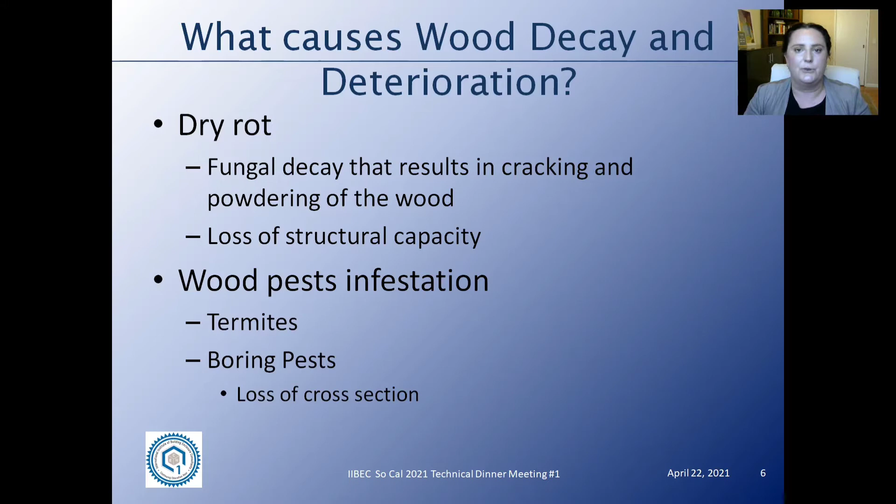Decay, or dry rot as it's less formally known, requires three different things to occur. It needs a food source, which is the wood itself. It needs water, and it needs fungal spores. So dry rot is actually a fungal infection that is eating away at the wood.

The main thing that really contributes to this is the presence of water. When we're talking about E3s, those are specifically wood elements on the outside of the building. Fungal spores are in the air, pretty much everywhere, and are blown with the wind. So the main thing we can control and look for is the presence of water and moisture. Really, it's regular and long-term exposure to moisture that can lead to wood decay.

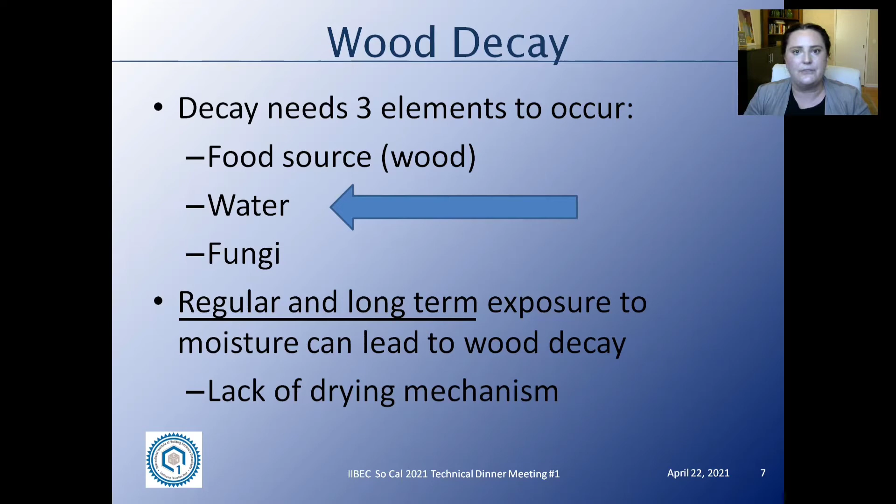Essentially the wood needs to get wet and not be able to dry out quickly. If you have a wood fence that's exterior and it gets rained on but is able to dry as soon as the sun comes out, you're really not going to get dry rot and decay like you would in an enclosed condition. What it comes down to is these E3s get water in through some kind of small opening or hole, and they do not have a good drying mechanism. So the water will stay for a long period of time and cause this fungal decay.

This is a fungus. Just because you can see and touch the soft wood in deterioration does not mean that is just the extent of the fungal decay. The guideline my company uses, and what we've discussed with different wood pathologists, is that the fungus can possibly penetrate into the wood 2 feet past what is visible decay.

If you have, like in this diagram I show, a part of the wood that's visibly decayed and is soft wood when probed, you should assume there's going to be further penetration of that fungal infection into the wood, possibly up to 2 feet.

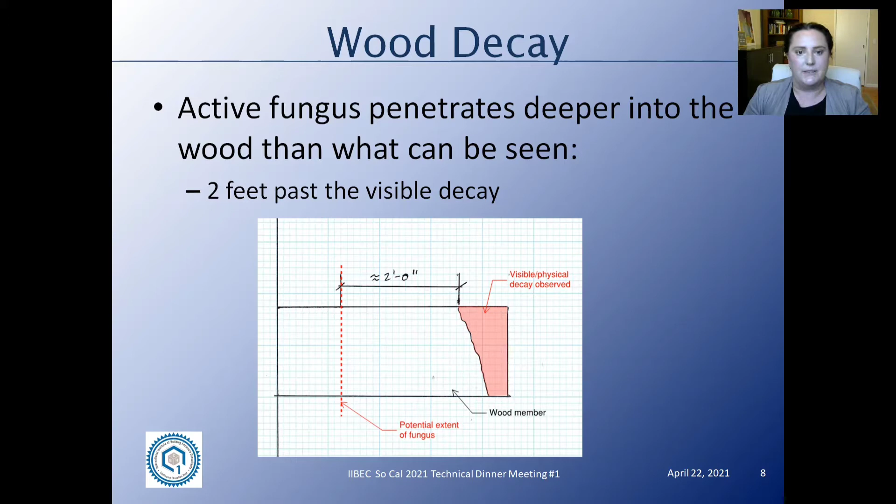Here's another example. This is a balcony deck with a coating on top of it. This portion of the deck was cut out, and you can see decay and deterioration within the plywood itself. This is cracking and delaminating of the plies of the plywood.

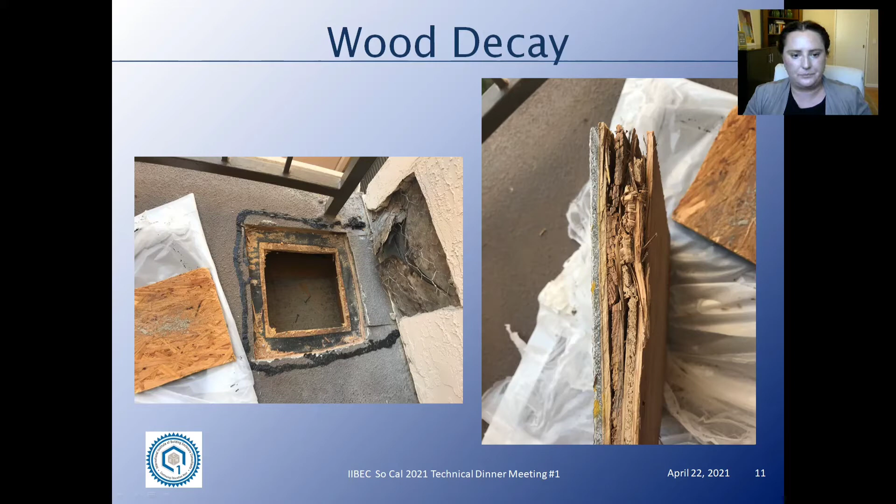Now let's talk about wood pests. There are lots of different types of wood pest. The main ones we find here are termites and some boring beetles. They tend to be attracted to wet wood. Really, for these pest infections, they need to be inspected by a certified professional.

The certified professional will be able to provide treatment options for this. But as inspectors, for the E3 inspectors, we can identify and look for some of the evidence that could indicate there's a wood pest infection.

The evidence really is termite waste, which is also called frass, and what I call wavy paint. The termites like to get into the end grain of the wood, and they eat up through the end grain of the wood parallel to the wood. So they'll eat underneath the paint a lot of times on the outside of the wood.

When they eat the wood and generate waste, it causes an expansion in volume, and it causes this kind of blistering that you can see in the paint. I'll show some examples of that.

This is a map showing the presence of termites throughout the United States. As you can see in California, and particularly along the coast, we have a very heavy presence of termites, and heavy to moderate up towards the more inland parts of California.

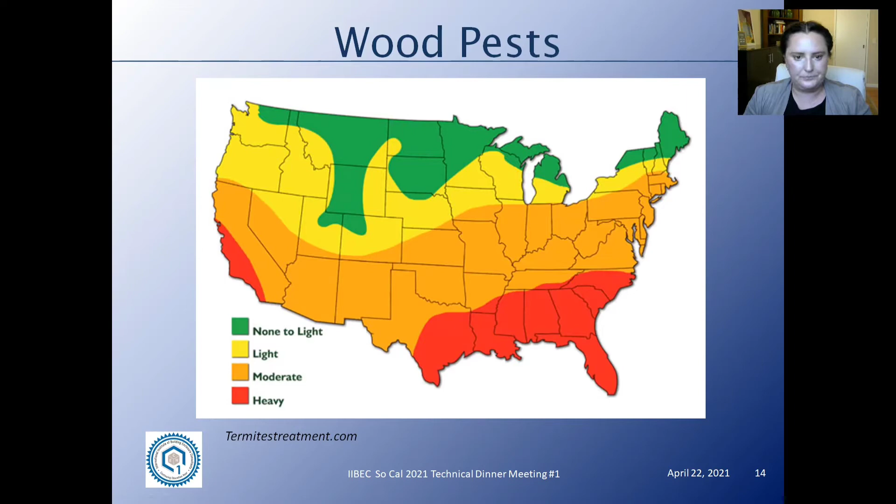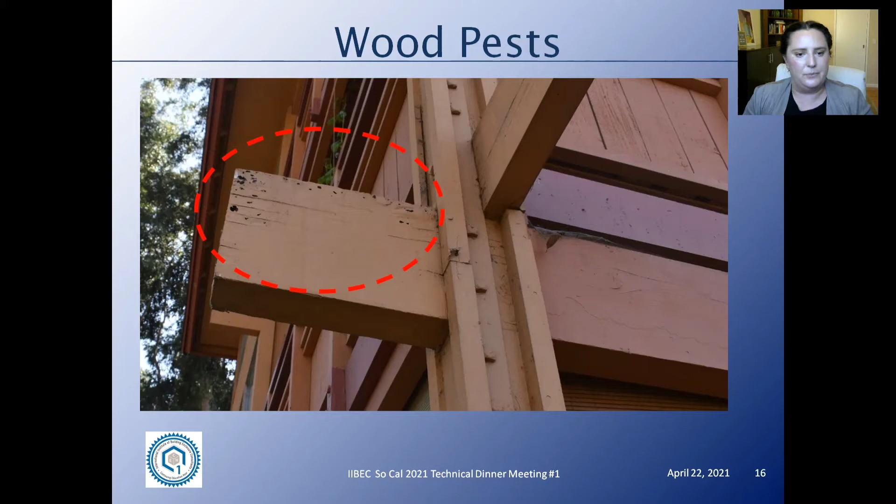So here's an example of a wood member, and here's a good example of some evidence of wood pest infestation. We have these small boring type holes throughout the wood, and you can also see a blister or a bubble that I call wavy paint.

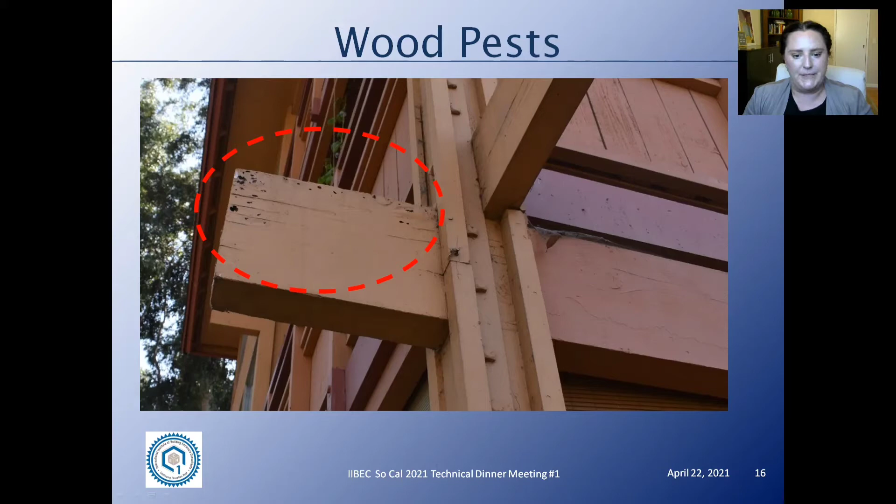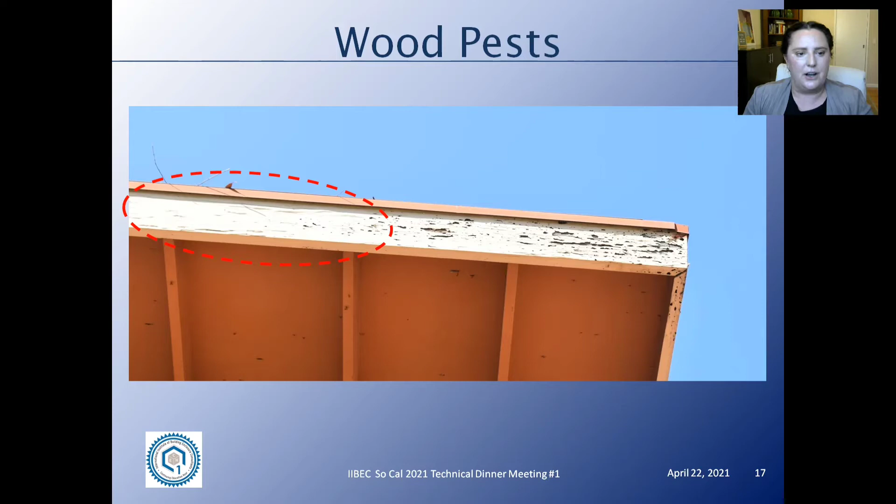Here's another good example: we've got some boring holes over here, and a lot of paint flaking. To the left, you can see the wavy paint areas. These could indicate that termites have actually gotten into this member and eaten along the end grain, causing little pockets of waste to form underneath the paint.

So now let's go into the basics of E3, particularly in the framing of the E3 elements and how that relates to inspection. What areas should you be concerned about when looking at these different elements, and what areas should you be paying attention to on a structural basis?

There are several different framing techniques, and a couple typical ones we see for these exterior elevated elements. First is cantilever, where the element cantilevers out from the building. Second is simply supported, which can be done in a multitude of ways, such as beam and post supported, or ledger and beam supported elevated elements. We also see quite a lot of cantilever combined with simply supported.

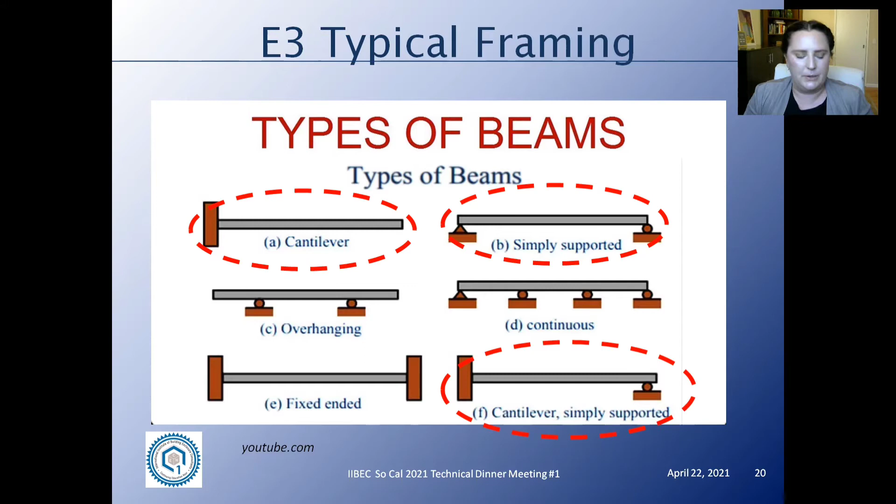This is framed by cantilevering out from the building, and then either a beam and post type support on the free end of the cantilever.

When looking at the loading diagram on a cantilever, this is a typical uniform distributed load on a cantilever beam. You can see our max shear happens where the beam enters the building, right at the support point, and our max moment also happens at that point.

So when looking at this from an E3 inspection type, we're concerned mainly with the structural capacity of the framing as it enters the building. If we have significant decay and deterioration where the beam enters the building, we could have a very problematic condition, because that is where the highest load and highest moment is happening within the beam.

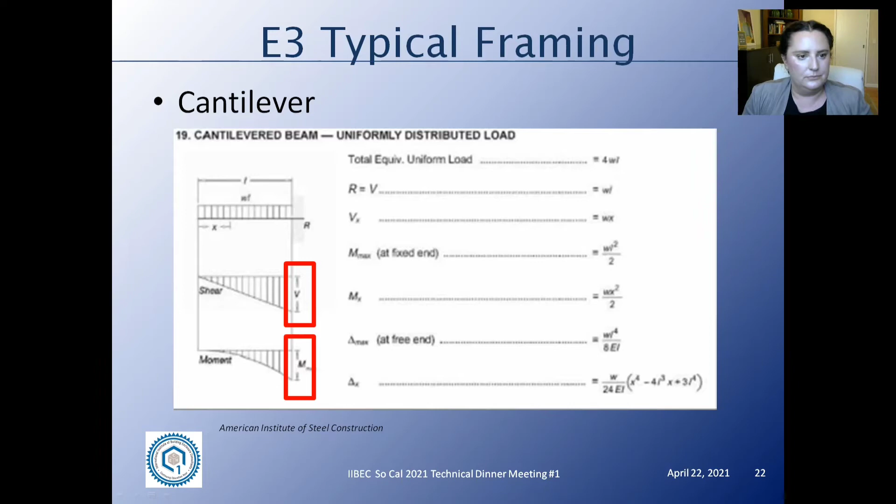When looking at a uniformly distributed load on the load diagram, the maximum shear is happening at the supports, and the maximum moment is happening in the middle. So when looking at this type of framing, you should be concerned with where the supports are occurring, where the high shear loads are occurring, and where the moment occurs in the middle of the beam.

One thing to note too, in terms of structural concern, right adjacent to where the support is, that's the concerned area, because your support is holding up this max shear here, but just to the left of it, just where the support ends, that's where you could have a catastrophic failure.

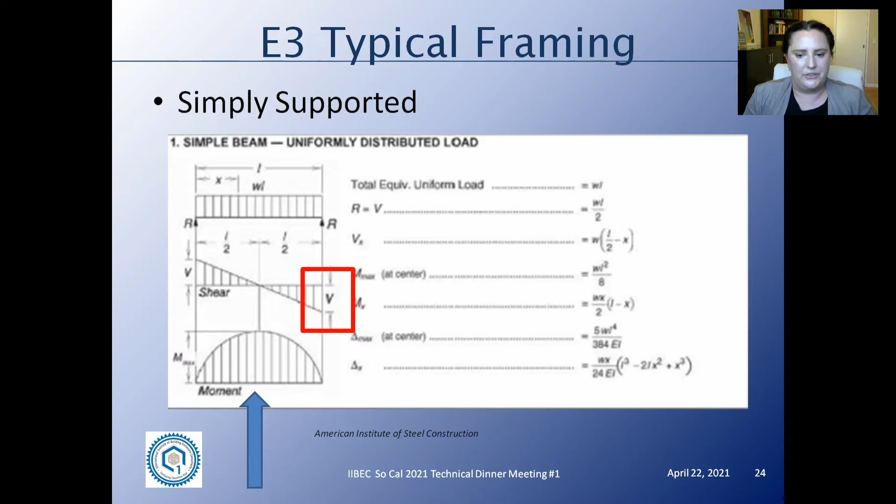So when looking at the support and loading diagram for that, it's a little bit more complex. We have shear locations at the supports, high moment where the cantilever beam enters the building, but also high moment in the middle of the span, and a shear at the free end of the cantilever. Essentially, the more supports you have, the more complicated the structural framing is, and the more areas you need to be concerned about when inspecting it from an E3 inspection point of view.

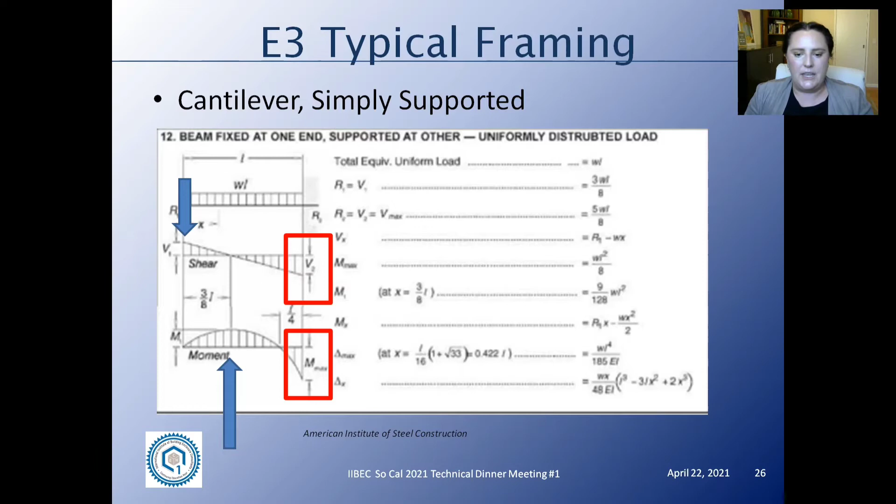The higher the amount of supports, you have an increase in redundancy. So in a cantilever situation, if cantilever joists fail, you have less redundancy to help keep the E3 element from collapsing. When you have multiple supports, like simply supported or cantilever and simply supported situations, you have a lower chance of an extreme catastrophic failure because you have more redundancy in your support system.

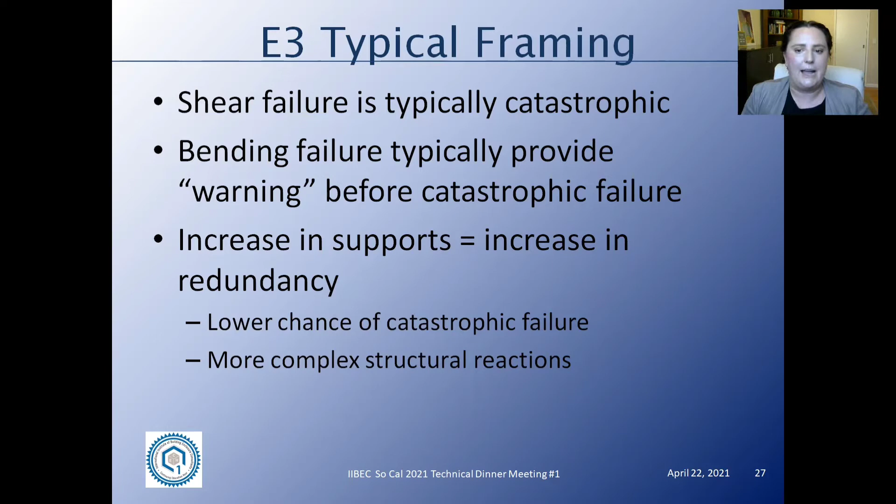Typically, when it comes to different types of failures, shear failure is considered more catastrophic. There's usually less warning provided on that. A bending failure typically provides some type of warning before a catastrophic failure, like extreme deflection in your joist, sagging, that kind of thing. So usually the bending failure is less catastrophic because you get a warning system, you can see it happening before you get an extreme failure.

So let's look at the different railings. These railings are also included in your E3 inspections, which we'll talk more about later, and they are considered part of the life safety. A lot of times people lean on these railings, and they're meant to prevent people from falling off of these balconies. So these are also very critical areas that need to be inspected as part of the E3 inspection.

So there's really two different kinds of framing for a railing system. There's the fascia supported or face mounted railing, where it's secured through the face of the balcony or the E3 element.

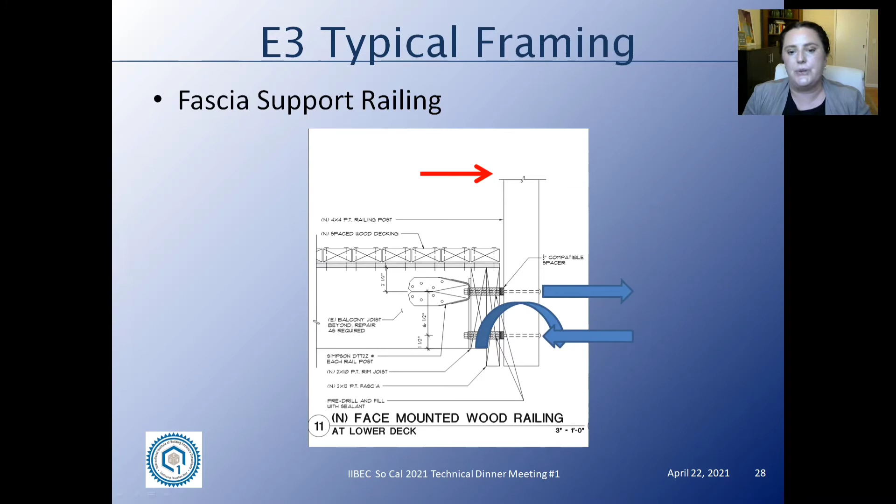Here's an example of a detail. If you push at the very top of the railing, it causes a moment down at the anchor points. A moment is also considered a couple force, or a coupling force, so it results in a tension and compression force within the anchor of this framing. So when considering where the structural concern would be on this balcony, you really want to look at these anchor supports and the wood framing members connected to them. If any of this wood framing or anchor systems have decay and deterioration, that should be noted as a concern that needs to be addressed at some point.

Now let's look at a top supported railing. This is the other style, typically done through base plates and individual posts or a shoe type railing system, secured through the top walking surface of the deck. Structurally, when we push that railing over, it creates a moment down at the base, which results in compression and tension forces within the anchors. So again, we need to look at these anchor bolts and the surrounding wood members supporting this railing to see if there's any decay or deterioration.

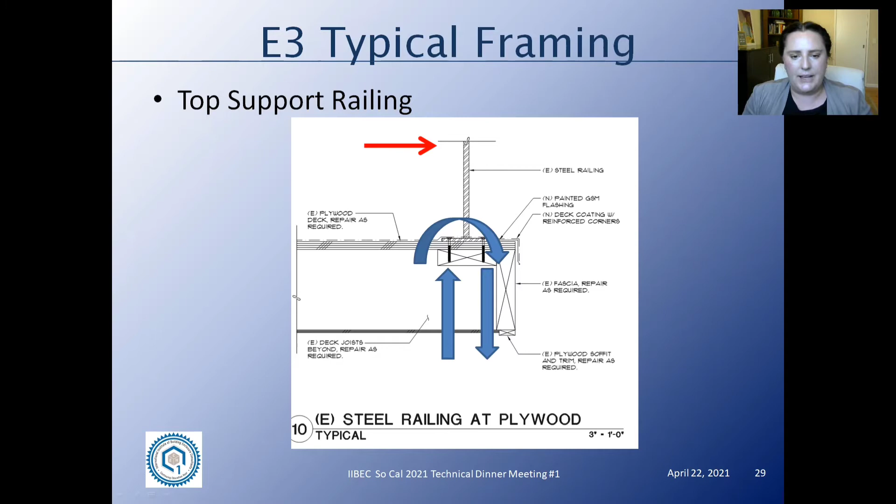One other item to note is that when looking at guardrails, we also need to look at the panels in the guardrails. Between the framing support posts, the panels are there to prevent people from falling off a balcony or going through it. So those also should be structurally sound when doing these inspections.

Looking at the E3 typical framing, there's decking, which can consist of a lot of different types: 1x2 wood decking, composite decking which is still wood-based, plywood sheathing with a waterproofing layer and a concrete topping, sometimes tile topping, and plywood sheathing with traffic coating directly on the plywood sheathing.

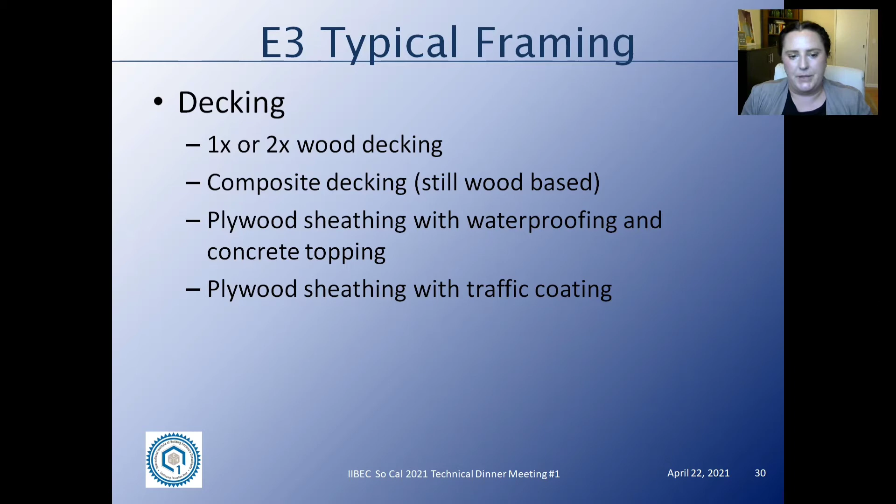Supporting members can vary as well. They're typically around 2x or 4x joists, or 4x or 6x beams and ledger type situations. There could be posts, 4x or 6x wood posts with a concrete post-base foundation, or they could also be steel posts. Those are not required as part of SB 721 and SB 326 because they're steel, so we'll get a little into that when talking about the different Senate bill requirements.

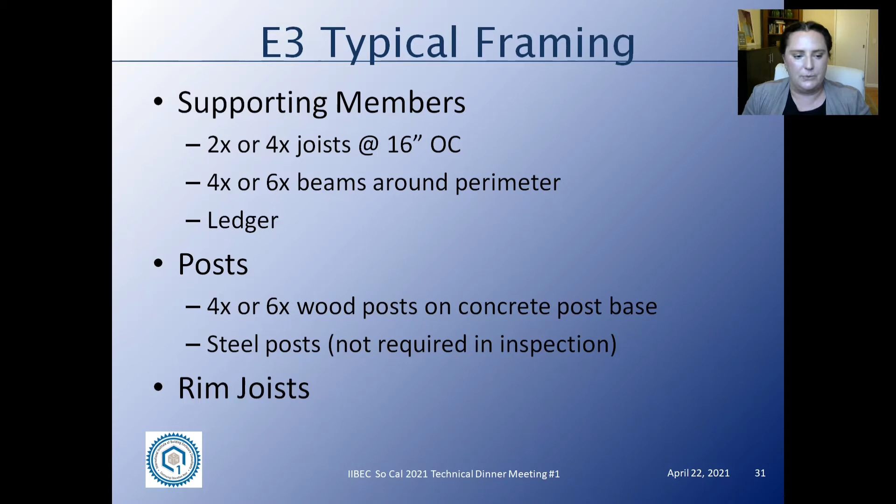Rim joists a lot of times are part of this, along with fascia and blocking. If you're looking at stairs, you can have stair stringers, which could be 2x wood framing, and risers and treads, which could be 1x or 2x wood. Guardrails can consist of a lot of different types: wood framing with posts and panels, wood framing with posts and spindles. You could have a completely metal railing, glass railing, and fascia mounted or top mounted typically is the framing part.

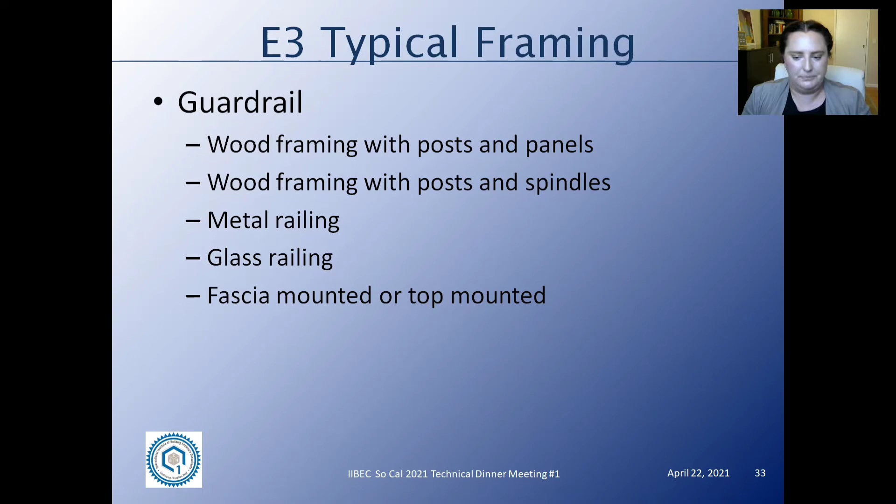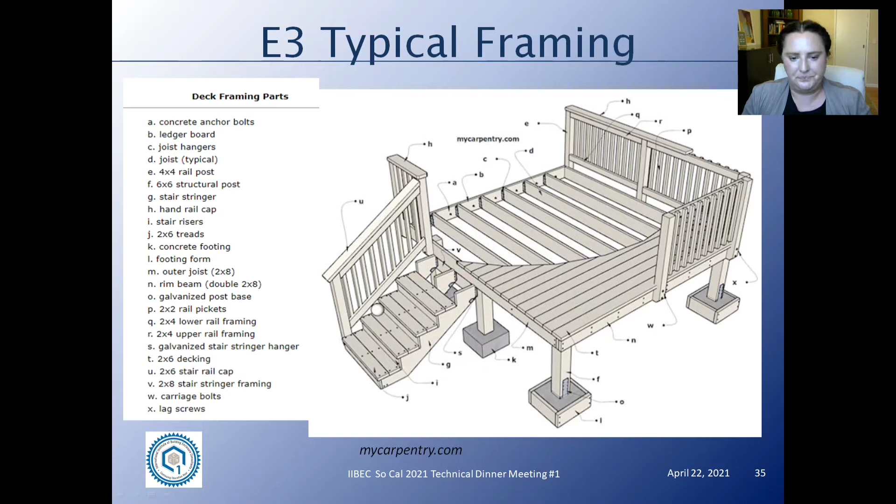So that's the basics of framing and the structural basics of how these E3 work. Now we're going to go into why we need to do these inspections.

On June 16th, 2015, there was the Berkeley balcony collapse. This is a very famous incident. It was a party at an apartment near UC Berkeley. The fourth floor balcony collapsed onto the third floor balcony and several people fell to their deaths. Six people died and seven were injured.

Wood decay was found to be a contributing factor to this collapse, and it resulted in several different actions, along with some other failures, pretty significant failures that occurred.

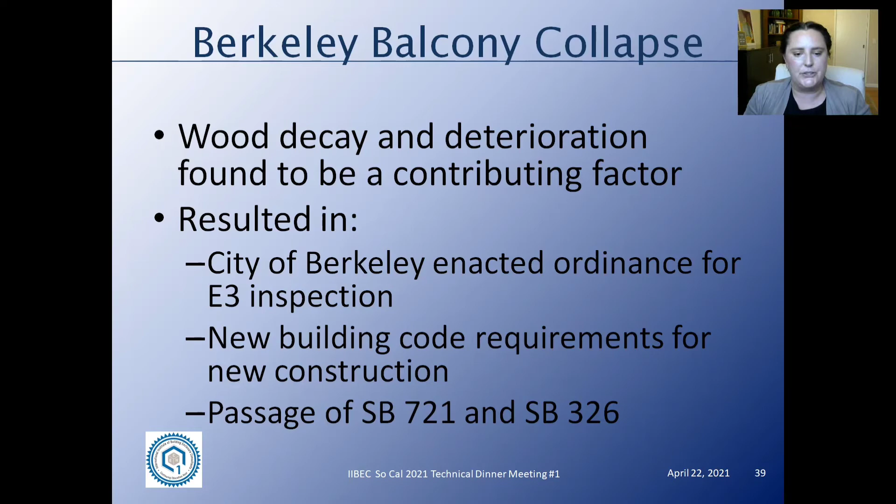The first thing was the city of Berkeley enacted an ordinance for E3 inspections. There were new building code requirements for new construction that was enacted in the 2017 emergency addendum and is now fully part of the 2019 California Building Code. It also resulted in the passage of Senate Bill 721 and Senate Bill 326.

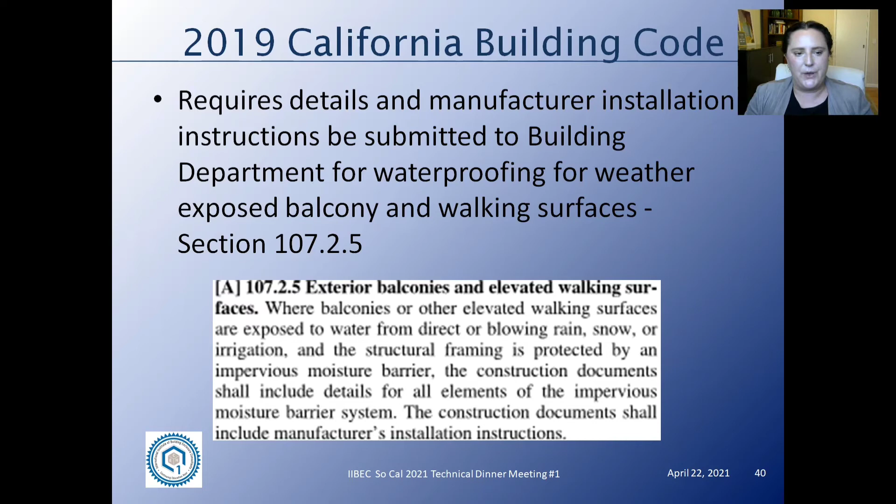So let's briefly look at what the new code requirements are for new construction. It requires details and manufacturer installation instructions for waterproofing for the weather-exposed balconies and walking surfaces to be submitted to the building department. It also requires either a building official inspection or a special inspection for the waterproofing portion of weather-exposed balconies.

The city, the municipalities can either include it as part of the building inspector's job or require special inspections. And we have actually seen some municipalities enact special inspections.

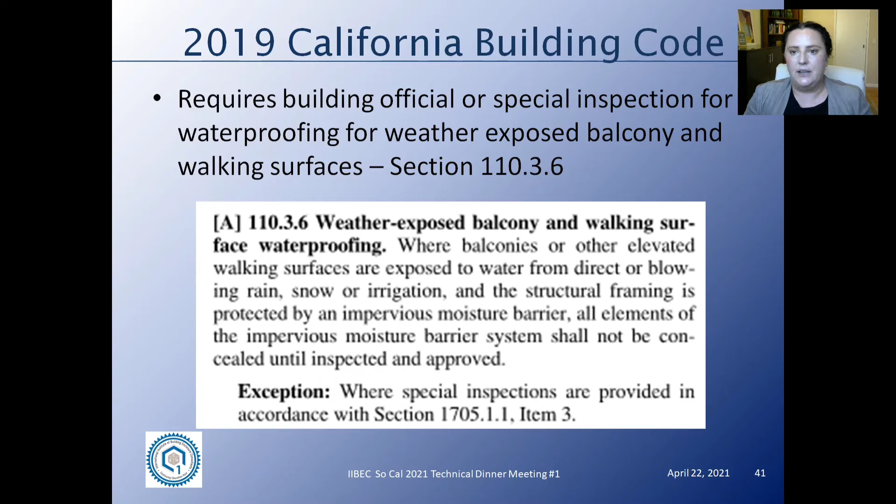And those special inspections are required under Section 1705.1.1, Item 3, which requires materials and systems to be installed in accordance with manufacturer's instructions that prescribe requirements not contained in this code.

It now requires venting in enclosed soffits underneath balconies and exterior elevated walking surfaces.

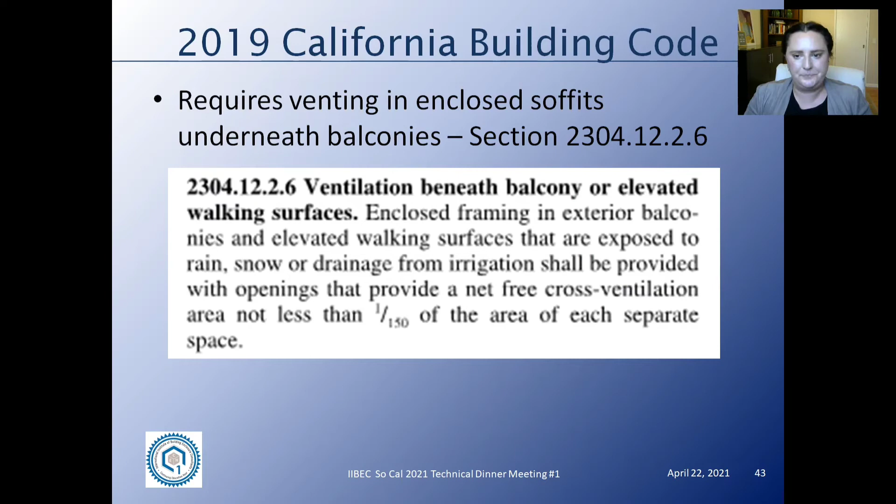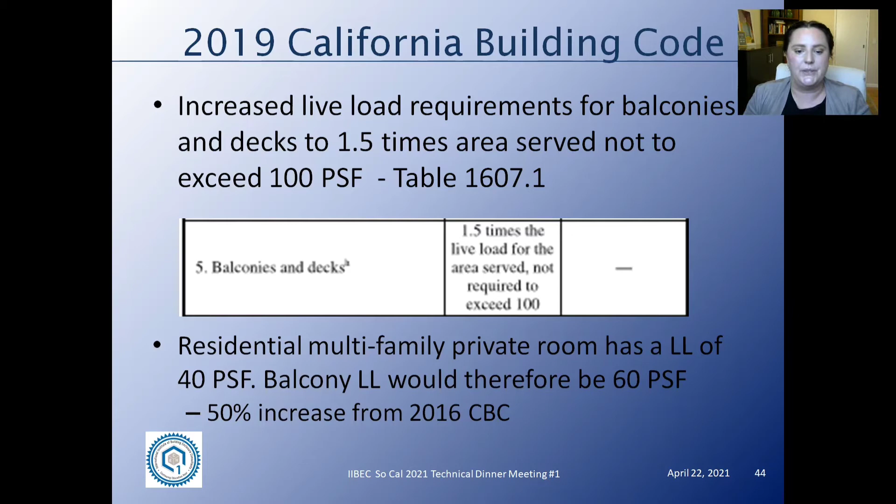And finally, it resulted in SB 721 and SB 326. These are two Senate bills that were passed to require regular inspections of exterior elevated elements.

First, we're going to go into some definitions. So what is an exterior elevated element? This includes balconies, decks, porches, stairways, walkways, and entry structures that extend beyond the exterior walls of the building, has a walking surface that is elevated more than 6 feet above ground level, is designed for human occupancy, and relies on wood or wood-based products for structural support.

Railings and guardrails are also included in these E3 elements, even if they are not wood-based. So if you have a metal guardrail on a wood-based exterior elevated element, then that is considered part of the Triple E.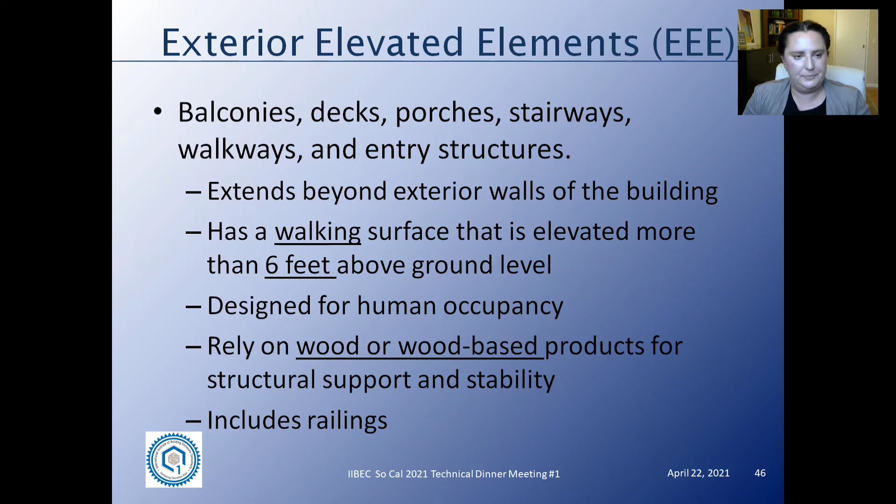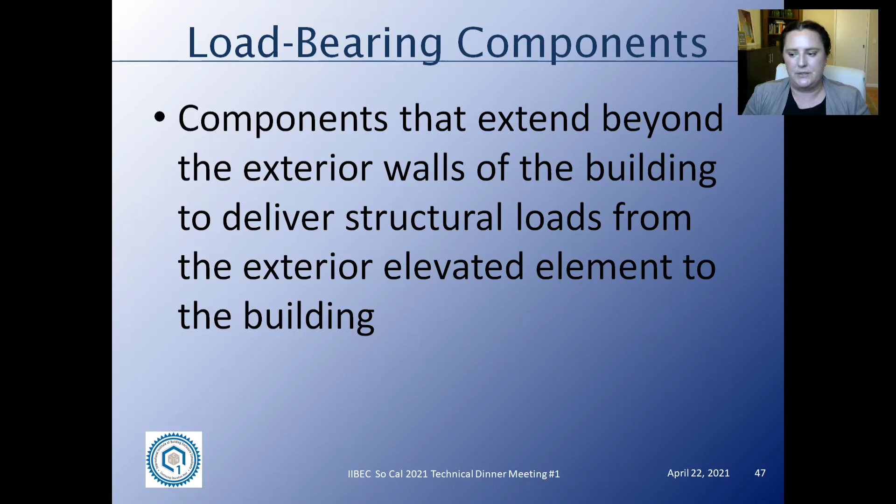And then what are load-bearing components? These are components that extend beyond the exterior walls of the building to deliver structural loads from the EEE to the building. So that's all the structural framing that holds up these EEEs.

And associated waterproofing elements is defined as items that protect load-bearing components of the Triple E from exposure to water and the elements. So this is flashing, membranes, coatings, sealants, etc.

So first, let's look at Senate Bill 721. This was passed in 2018, and it requires inspection of Triple E's of multifamily residential buildings with 3 or more units. This excludes common interest developments, so condos and co-ops, etc., are excluded from SB 721.

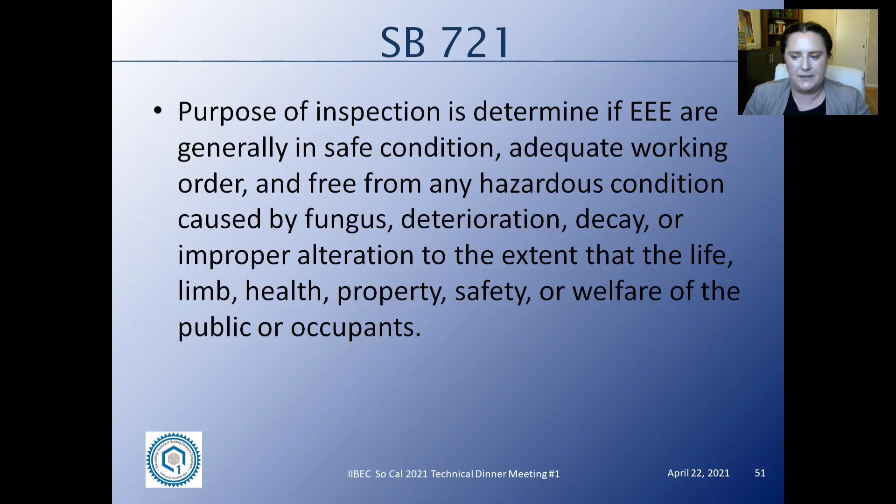As a direct quote from the bill, the purpose of inspection is to determine if the Triple E's are generally in safe condition, adequate working order, free from any hazardous condition caused by fungus, deterioration, decay, or improper alteration to the extent that the life, limb, health, property, safety, or welfare of the public or occupants. So that is the main purpose of this bill.

It requires a minimum of 15% of the load-bearing components and associated waterproofing elements of the EEEs to be inspected on a building. The report is due to the owner within 45 days, and the owner is to keep a copy of that report for 2 inspection cycles. And it should be noted that the report timeline does not depend on how many EEE elements are inspected. If you inspect 3 balconies or 300 balconies, you still need to give the report to the owner within 45 days.

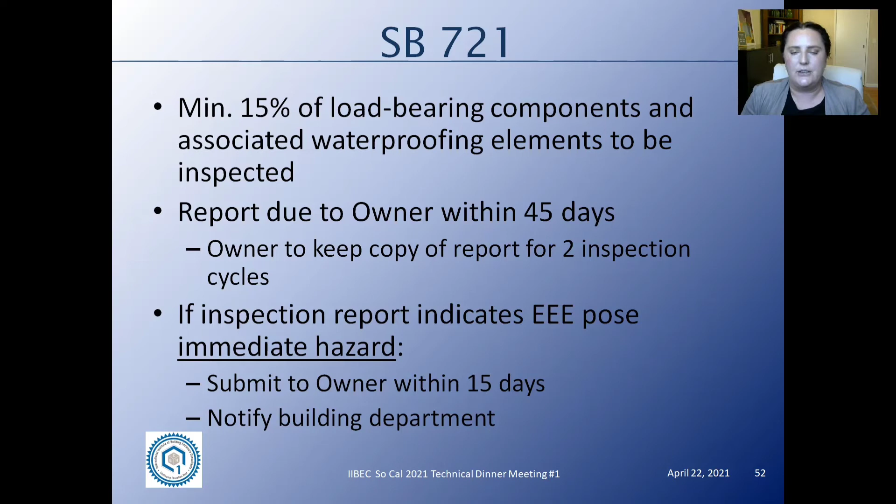If the inspection report indicates that one or any of the Triple E's pose an immediate hazard, then you need to submit that immediate hazard report to the building owner within 15 days, and you also need to notify the authority having jurisdiction. These inspections can be performed by a licensed architect in the state of California, a licensed engineer from the state of California, a licensed contractor with an A, B, or C5 license with a minimum of 5 years experience, or a certified building inspector.

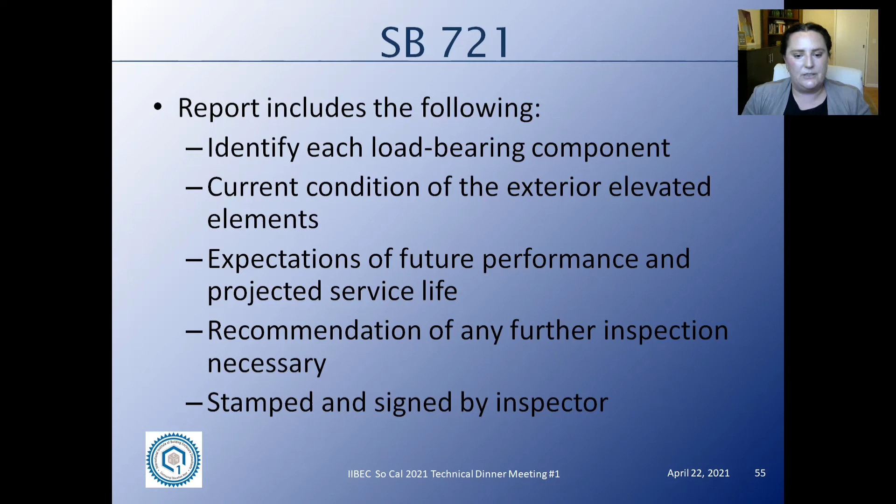The inspections need to occur every 6 years, so this is an ongoing maintenance item that building owners need to do. And the first inspection needs to occur by January 1st, 2025. And the inspection entails a quote-unquote visual inspection of load-bearing components and associated waterproofing elements of the EEEs. The report needs to include the following. Identify each of the load-bearing components, so a diagram of the structural framing is a good idea. It needs to say what the current condition of the triple E is, expectations of future performance and projected service life, recommendation of any further inspections, and it also needs to be stamped and signed by the inspector.

It also needs to include photographs, test results if you do any kind of testing on these elements, and a narrative of what was observed and what was inspected. And if any of the triple E's pose an immediate threat to the safety of the occupants, the inspector in the report needs to indicate whether restricting access or temporary shoring is necessary. Following these reports, if there's any immediate hazards noted, then the owner needs to immediately start repairs or actions to limit access to that triple E.

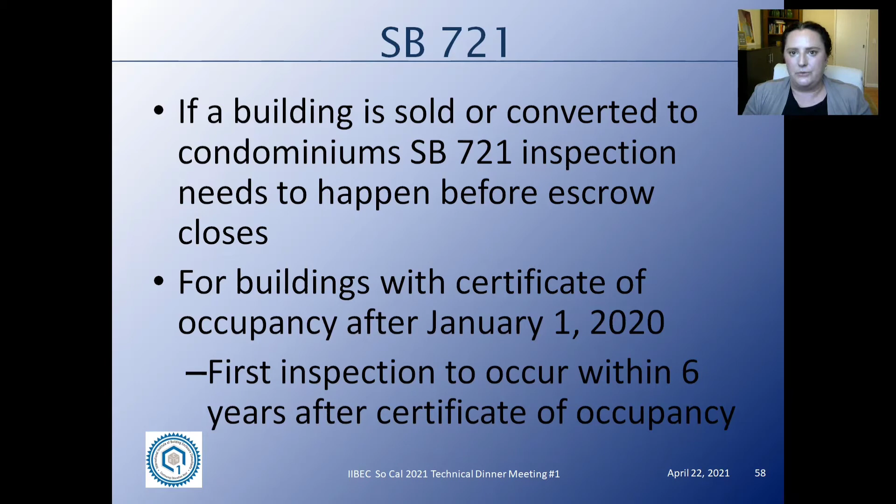Any corrective work identified in the report needs to be completed within 120 days of an approved permit. If the owner is not compliant within 180 days, there are fees that can be implemented by the building department. If a residential building is sold or converted to condominiums, the SB 721 inspection needs to happen before escrow closes. And for buildings that were built after January 1st, 2020, the first inspection needs to occur within 6 years of the certificate of occupancy. So this is something to note too. The age of the building does not matter for 721. Even brand new buildings are going to require these regular inspections.

So now let's look at 326. And 326 was passed to close the gap that 721 left with respect to condos and common interest developments. So 326 is the same EEE inspection requirement for common interest developments. This was passed in 2019. And again, it's inspection of the triple E's of multifamily residential with 3 or more units. So if you have a duplex, it's not considered part of this requirement. Again, the purpose of the inspection is to determine if the triple E is generally in safe condition, adequate working order, and free from any hazardous conditions caused by fungus, deterioration, decay, or an improper alteration.

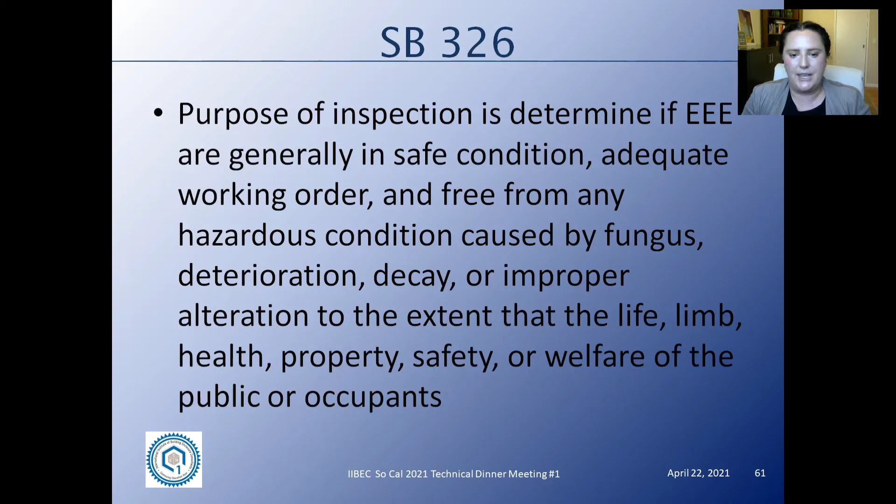A little bit different. The amount that needs to be inspected is a random, statistically significant amount. That means the amount that can provide 95% confidence with a margin of error of plus or minus 5%. So this Senate bill leaves it up to the inspector to determine how much needs to be inspected as part of their professional judgment to provide 95% confidence. The report is due to the owner. However, there's no timeline given, and the owner is still to keep a copy of the report for 2 inspection cycles. And by owner, I mean HOA or board. If an inspection report indicates the triple E poses an immediate hazard, you need to immediately notify the owner and notify the building department within 15 days.

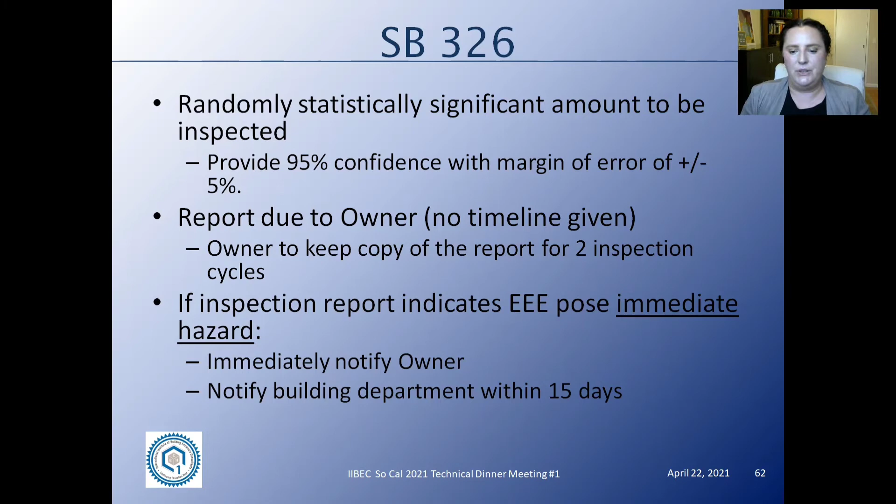These inspections can be provided by a licensed architect and a licensed engineer in the state of California. The inspection cycle is every 9 years, and the first inspection is to occur by January 1st, 2025. And again, it's a quote unquote visual inspection of load-bearing components and associated waterproofing elements. And the report requirements are the same as for 721. And again, if any triple E's pose an immediate threat to the safety of the occupants, the inspector or the report writer needs to indicate whether restricting access or shoring is necessary.

Following the report, repairs or actions need to happen immediately to address the hazardous conditions, so the immediate threat to life safety conditions. For condominiums with a certificate of occupancy after January 1st, 2020, the first inspection has to occur within 6 years of the certificate of occupancy. So like 721, for 326 the age of the building does not matter. Brand new buildings will also need to follow these inspection requirements.

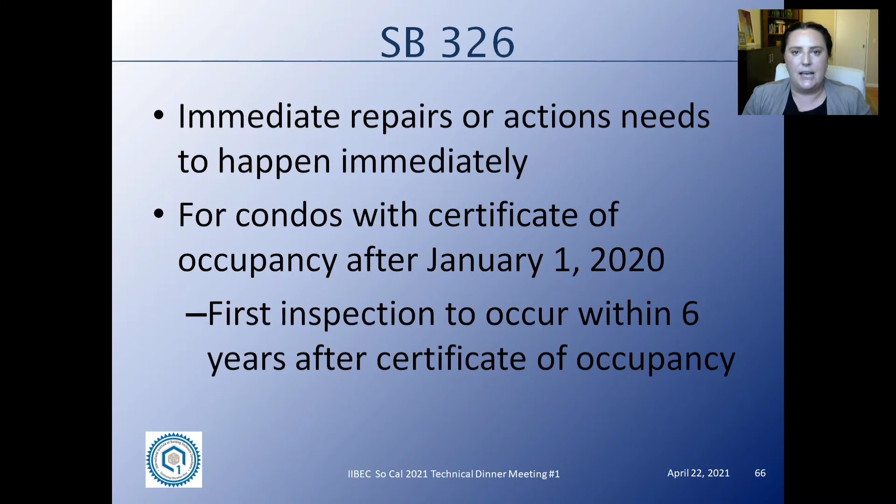So let's look at the main differences between 721 and 326. 721 is for multifamily residential of 3 or more units, excluding common interest developments, excluding condos. A lot more people qualify as inspectors under 721. You could be an architect or engineer or a GC or certified building inspector. The cycle's a little bit quicker, of 6 years, and there are timelines of when the report's due to the owner and when the owner is required to make repairs. And it also requires a 15% minimum inspection.

326 is specifically for condominiums and common interest developments. It limits the people who are qualified to be inspectors to just architects and engineers. The inspection cycle is every 9 years. There's really no time limit unless there's an immediate threat identified. And the amount of inspection is really left up to the professional judgment that will provide a 95% confidence with plus or minus 5% margin of error. So essentially you have to be a statistician to determine how much of the E3s you need to inspect.

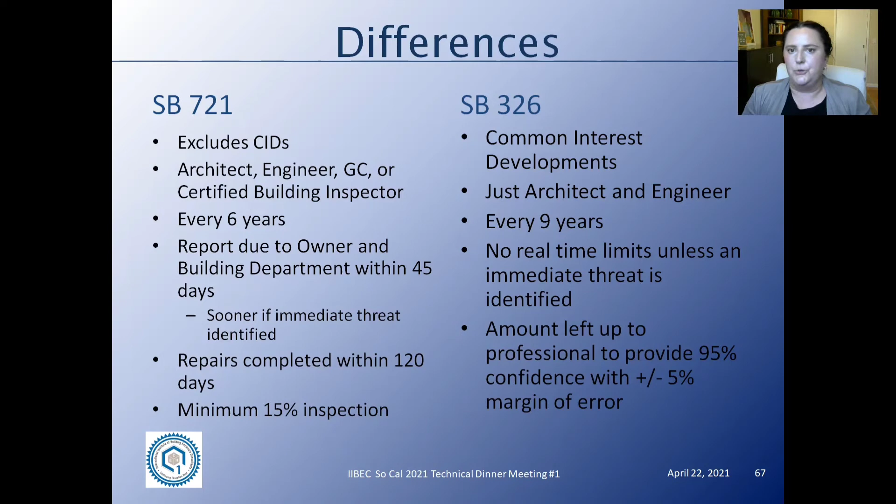One thing to note for both 721 and 326 is if problematic conditions are observed, then you are required to do additional inspections. The amount additional is left up to the professional. So if you inspect 100 balconies and 50 of them have problematic conditions, you as the professional need to determine how many more you want to inspect. It could be you now require full inspection. It could be now you only need to see an additional 2 or 3. It is left up to your professional judgment.

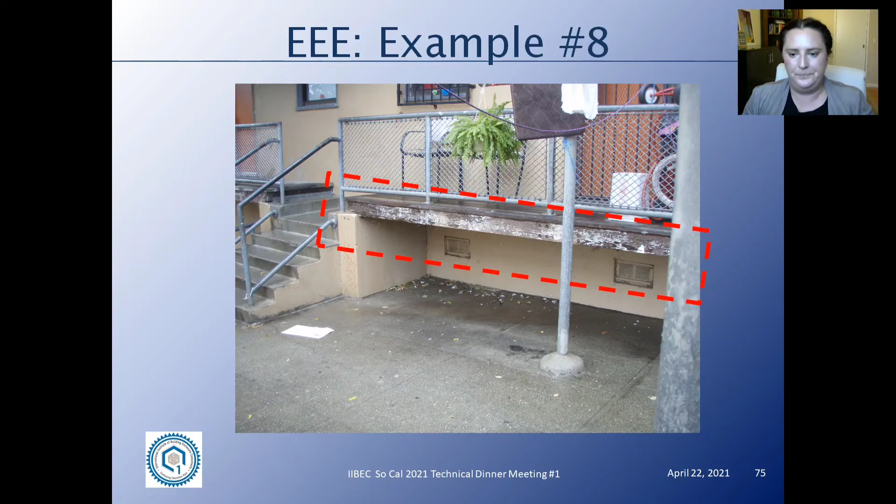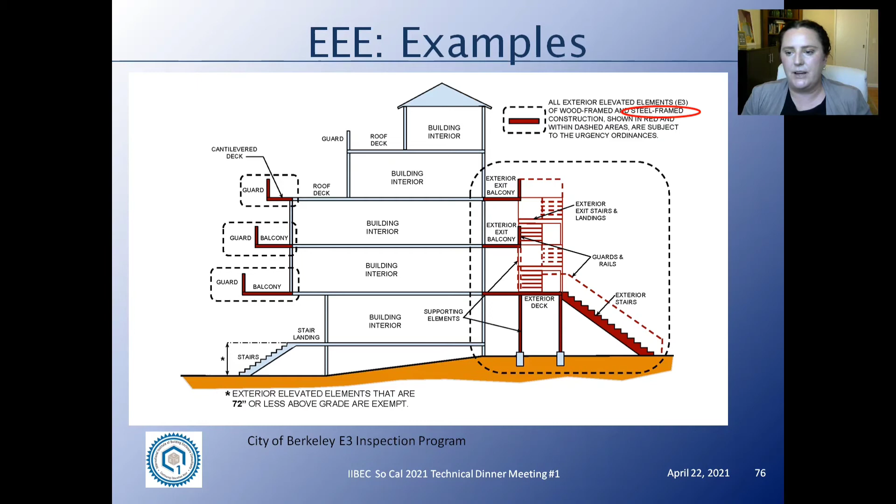And here's a great diagram. This is from the City of Berkeley E3 inspection program. So this diagram shows that these elements, these balconies and guardrails that are extended out, are part of the E3. Same thing with this stairway here. You can see here this stairway is not because it's indicated as less than 6 feet. And then also something to note, these roof decks that are over occupied space are not part of the E3 requirements. One thing to note that's different about the City of Berkeley is that they also include steel framing within their E3s, whereas the 2 Senate bills are purely for wood framed or wood based products.

So a couple tips when proposing inspection work and keeping your owners and clients informed. I would inform the owner that you're going to need access to both the top and the underside of the triple E's. So you need to look at both the framing of the balconies and the exterior walking elements, and also look at the decking and the guardrails on top as well. So typically that means you're going to need access to the underside, and you're possibly going to need access through units in order to get to the top side of these decks.

You may need to perform DT to review the load-bearing components. So if you have an enclosed soffit, the only way that you're going to see the load-bearing components is if you actually get in there, so it's going to require opening up some of these areas. And just keep in mind too, this has to happen on a 6 or 9 year cycle. So you're going to need to do these DTs every 6 or 9 years, depending on the construction you have.

One thing to note too, when performing due diligence or property condition assessment, inform the owners of the building that it's going to require regular inspection based on the 6 or 9 year cycle, because of these Senate bills. You also want to indicate to the owner or HOA that they may need to carry a budget to perform immediate or emergency repairs.

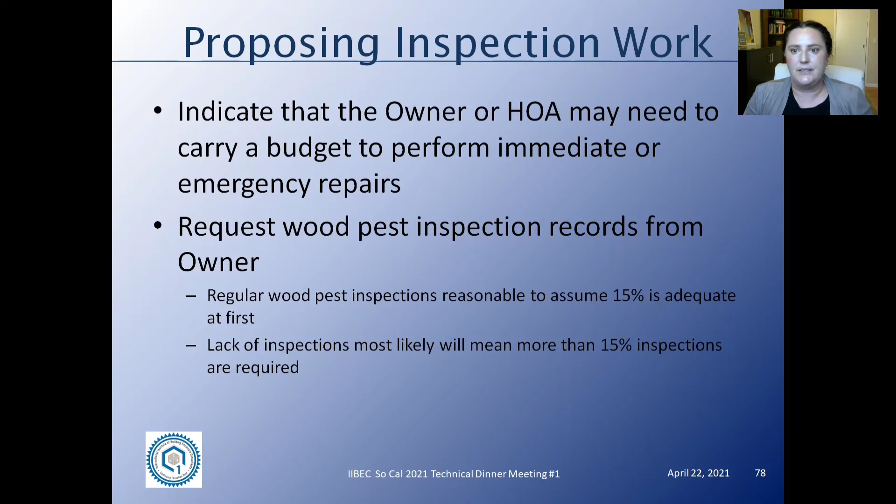I went to a wood framed construction seminar a couple years ago, and there was a wood pest expert there, and he recommended getting an inspection every year. And so at my personal house, I have started getting a termite inspection every single year. And every year there are termites that need to be treated. It's just a constant issue that we have to deal with in California.

So now let's go into the means and methods of doing these inspections. The number one question I get on these inspections, particularly if you have an enclosed soffit, is do we need to probe and do we need to do destructive testing in order to remove the soffit to physically probe the structural members? There are people and companies out there that say that they can basically drill a small hole and use a borescope to look at the framing. And technically the Senate bill does say it's a visual inspection. However, I'm going to give some examples as to why I think you need to probe.

Probing uses a sharp tool like shown down here. You can also use something like a flathead screwdriver, even sometimes a pen or keys if you're really desperate. What it does is check for soft wood that indicates decay. It's also a good way to find evidence of wood pest, because a lot of times when I probe that wavy paint, you have wood pest waste that comes out, and you can easily indicate that there's some wood pest infestation.

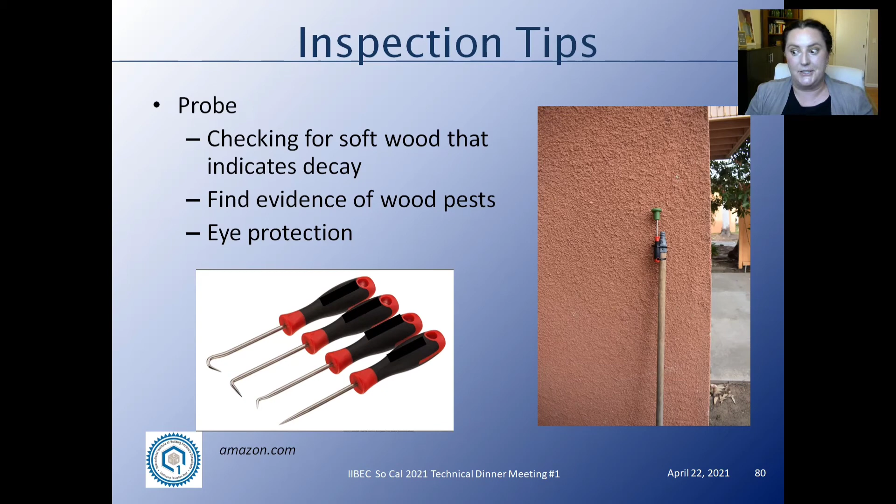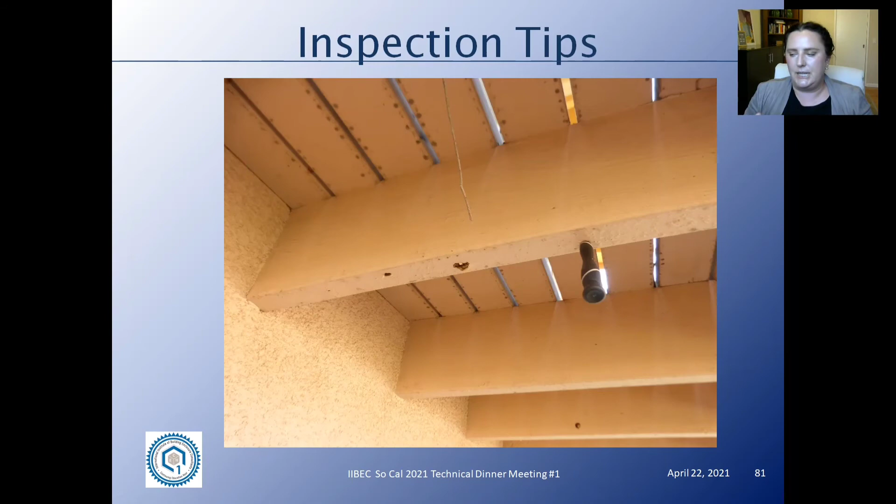So why do we probe? If you look at this photo here, this photo was provided by Tracy Myers of Myers Consulting. Thank you to her. This is a cantilever wood joist. If you ignore these previous probes and you look at this joist, it looks like it's in pretty pristine condition. Visually, I don't see any issues with it. But as you can see, this is a probe that's inserted 4 to 6 inches into this wood. That is how much this joist has decayed. So just visually looking at something, you're not really going to be able to tell the condition of that wood unless you probe.

So then I also recommend checking the guardrail. This is very important as the guardrail provides a life safety measure. First, I shake the guardrail, see if it's loose. If it's loose, you can pretty much guarantee that either the connections, the anchor bolts, are deteriorated, or the wood that's holding the anchor bolts is soft and deteriorated as well. If the wood surrounding the anchor bolts has lost some of its structural capacity, your anchor bolts now do not have solid wood to grip onto. So your guardrail will be loose.

Also check the guardrail panels. As I mentioned before, panels are there to provide a structural barrier so that people can't fall off or things can't fall off these balconies. Check for soft spots in the decking. So when you walk around, feel for soft spots and bounciness within the decking itself.

If you have a plywood sheathing with a traffic coating, look for cracks and seams within that traffic coating and then the plywood, as those are the first areas that generally will fail and cause water to be able to get in.

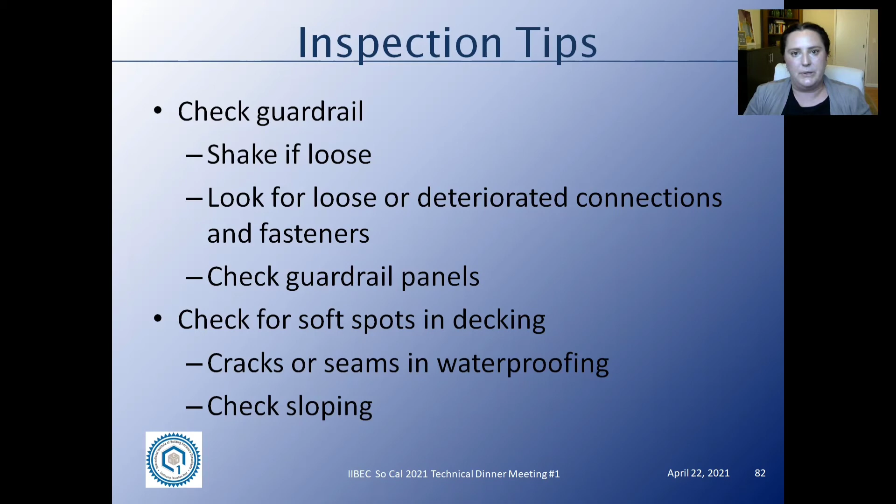If your balcony slopes to some kind of area drain, or if it's supposed to slope to sheet drain off the edge, check for sloping, because if you have water that's ponding on your balcony in specific areas, that could indicate that, one, you have decay in your framing underneath that has now settled and allowed for ponding to happen, or two, it was built that way and now you have water buildup in specific areas that could lead to decay and deterioration.

90% of leaks occur from 10% of the waterproofing. So that really talks about how most leaks occur around the perimeter conditions and around penetrations. Pay special attention to seams in sheet metal flashing. Sheet metal flashing is used a lot in these balconies as either perimeter flashing, saddle flashing, drip edge flashing.

And while the sheet metal itself is waterproof, things can't get through the sheet metal, the seams generally are not treated very well or constructed very well. And when the seams start to pull apart, that's how water can get in and underneath sheet metal flashing. And since sheet metal flashing is so waterproof, it can keep water in there for long periods of time and lead to the decay that we see.

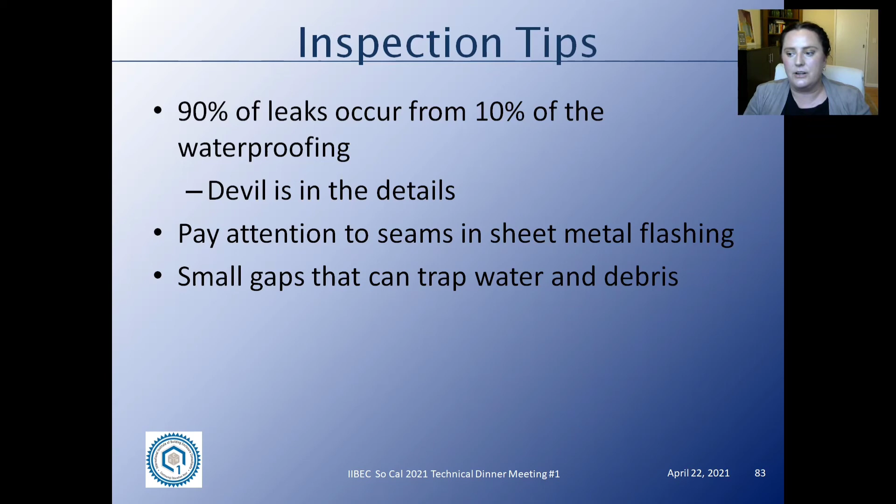Look for small gaps that can trap water or debris. These small gaps are very pernicious because they allow water in, but it's hard to get water out once you've got it into these small gaps. As I mentioned, pay special attention to the edge conditions and any penetrations.

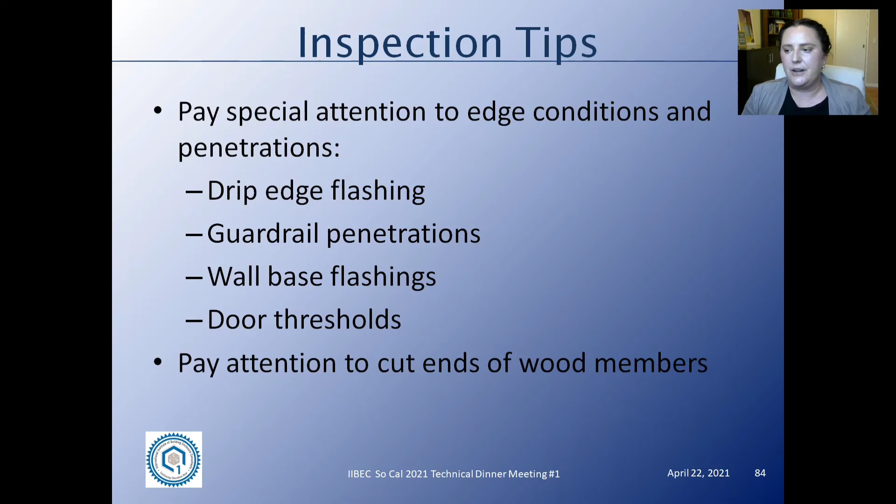And then finally, pay attention to cut ends of wood members. So dry rot and termite infestation typically gets into the end grain of the wood. So if you have a cantilever joist, typically the decay and the termites start at the end of the joist, the free end of the joist, and work their way through. So let's look at some examples of problematic conditions.

Here's an example of soft decking. So this is again a probe that completely went through the decking here. This particular area was an area of concern because everything on this balcony sloped to this area, and you can see lots of debris that have gotten caught in the end pieces here. And one note on debris and leaves. One, they attract bugs, and two, it easily traps water. So all these leaves and dirt can get wet and sit there wet for long periods of time against the wood.

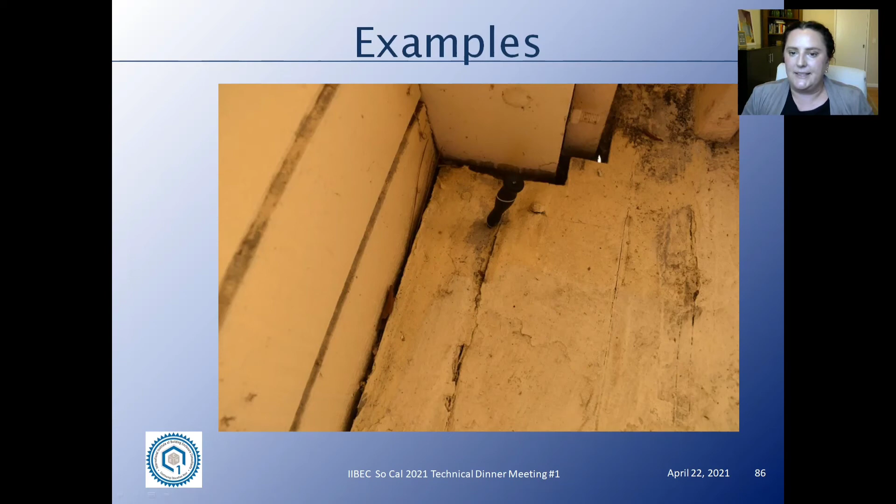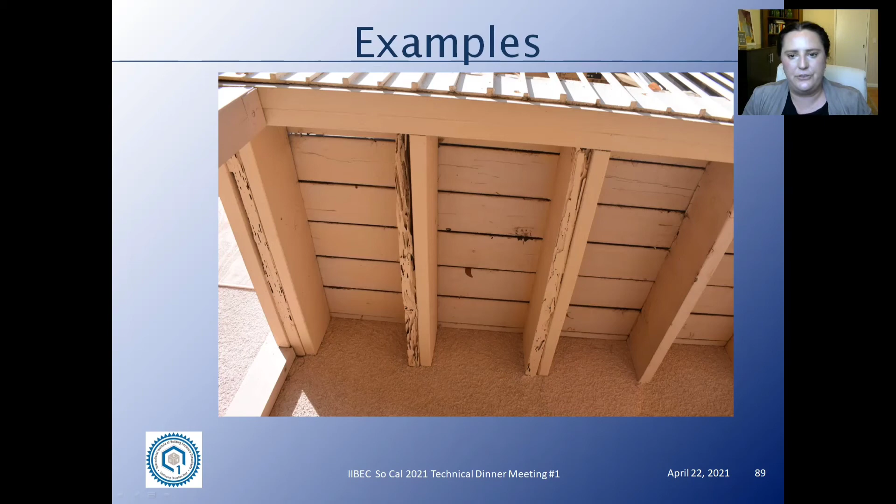Here's an example of what termites can do. So they get into the end and they just eat their way through the joist here. This particular balcony was retrofitted at one point and supported by posts and beams. But then the balcony above is also completely destroyed by termites, and there really is no post and beam support on this balcony above.

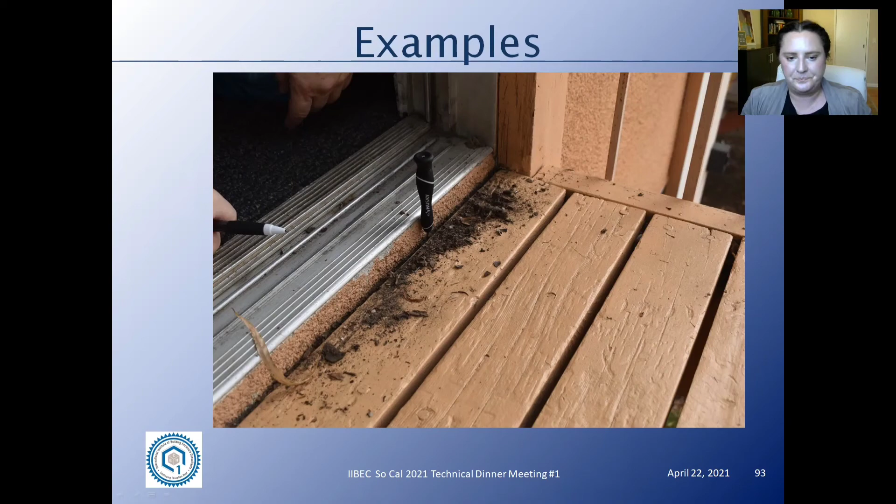Here's another example of dirt and debris being trapped in a small area that can cause some decay, and this is actually a probe into the joist below showing that there is some decay.

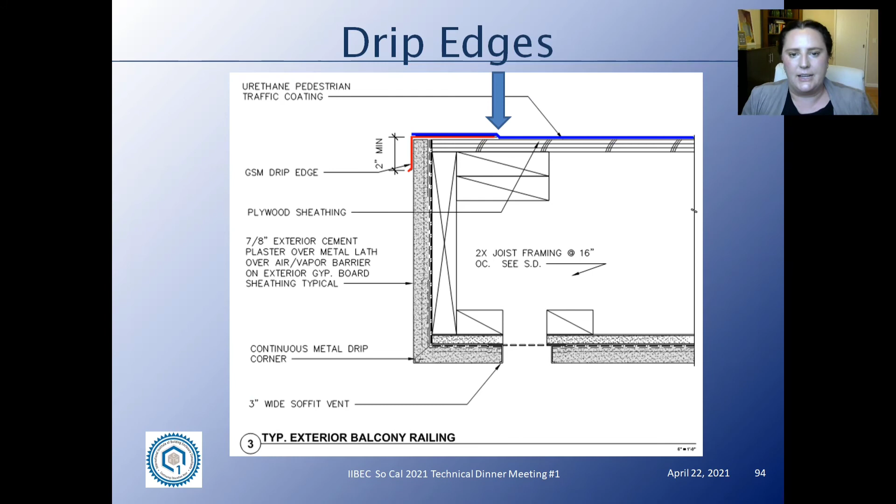In terms of details, there are specific areas that tend to be problematic. One is drip edges, particularly when we have a traffic coating on top of plywood sheathing. Right where the sheet metal flashing ends, this joint within the traffic coating tends to be a weak point. This drip edge heats up from the sun and can expand, causing differential movement between the plywood and the drip edge, which can crack right along the seam and allow water in.

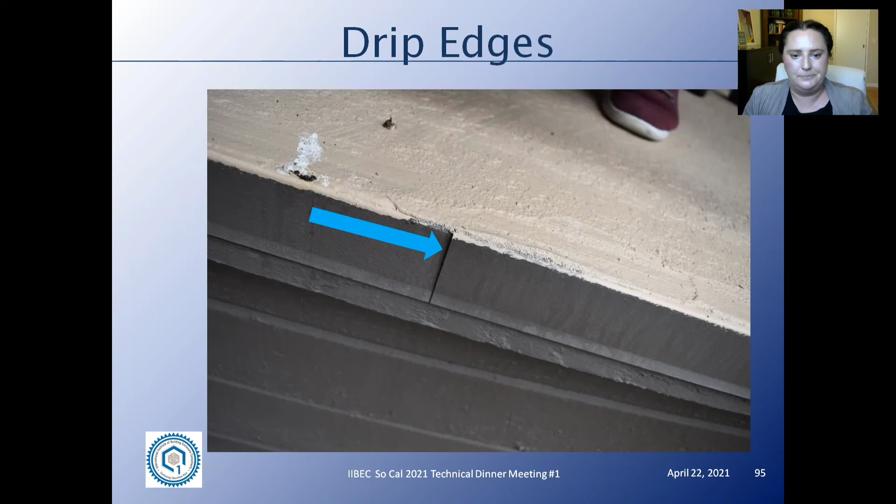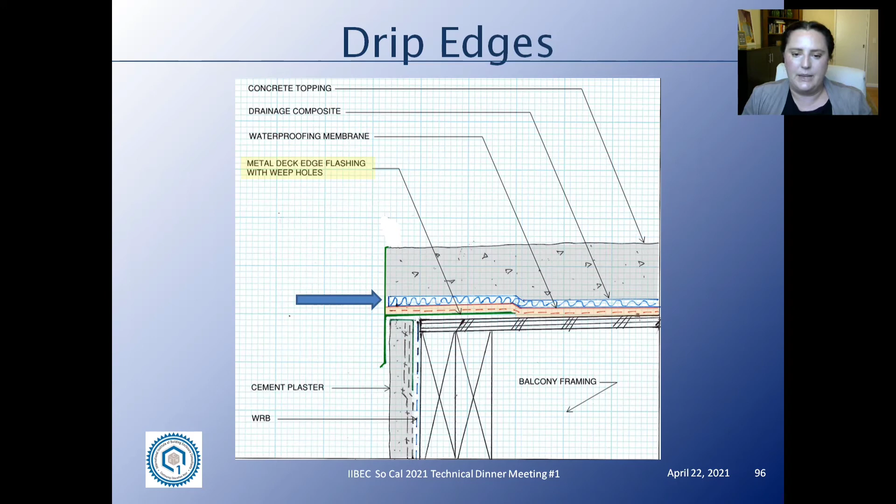We just don't know - it could be directly over the plywood, allowing water to get in. Another drip edge type serves as stop edges for concrete topping, often with weep holes to allow drainage underneath to escape. The issue is these weep holes either need to be perfectly located right where the drainage matrix is, or they get filled with concrete and blocked. Once weep holes are blocked, you can have a buildup of water within the system, and that buildup tends to find the next weakest point - a small crack or penetration somewhere that allows water in because the buildup can't easily drain.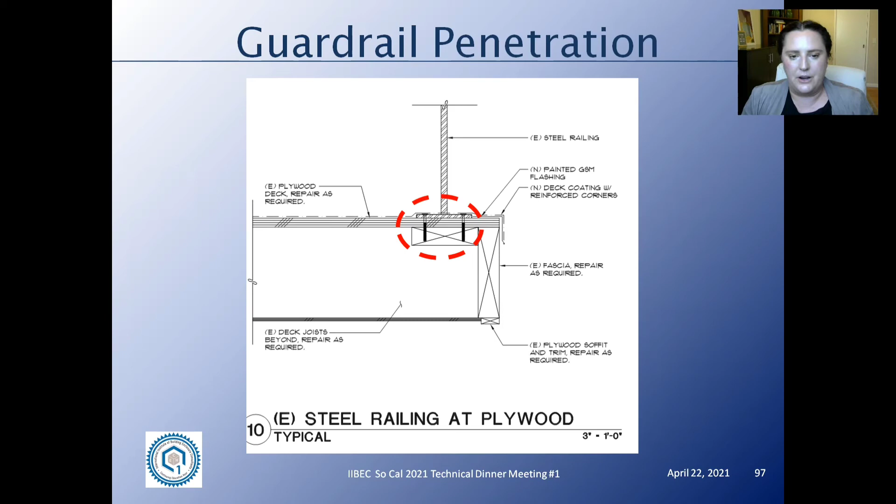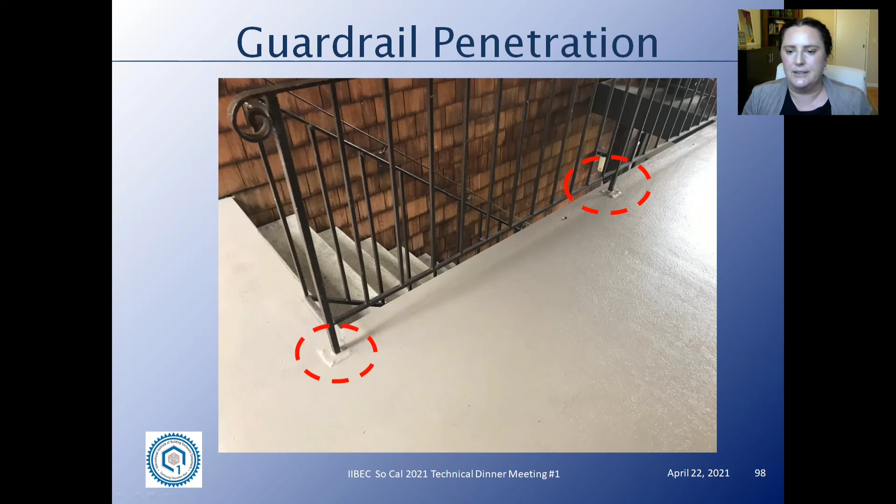Another area that tends to be problematic is top-mounted guardrails. There are many sharp transition edges here, and you can have a lot of differential movement and expansion-contraction movement between your balcony guard railing and adjacent wood members. These are areas that should be paid particularly close attention to during E3 inspections, because they tend to fail and allow water to penetrate.

Another area is door thresholds, again because of sheet metal flashing. This is a sill pan that extends out, and the traffic coating extends onto the sheet metal. This is a weak area that will fail at some point throughout the age of the building and could allow water to come in.

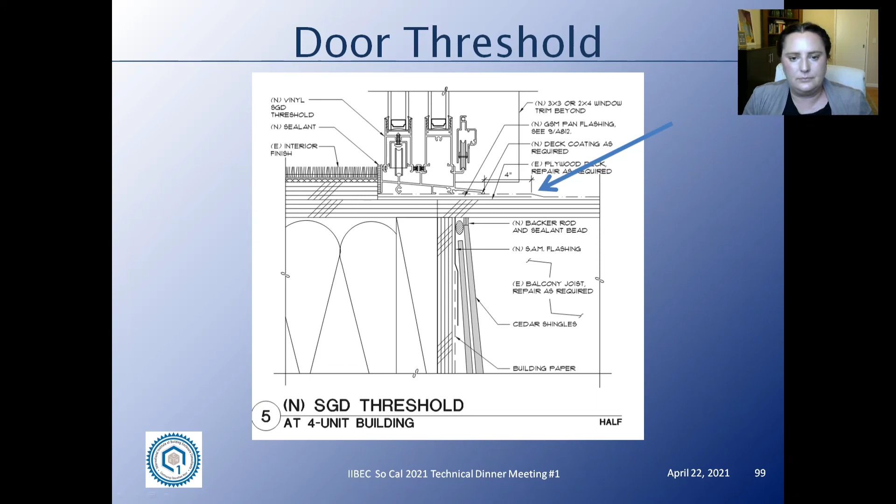Same thing with wall-base flashings. A lot of times these wall-base flashings are sheet metal L angles, and we can have a weak point right where the sheet metal L angle transitions to the plywood. We can also have a weak point if the wall waterproofing is not adequate. I have seen locations where this wall-base flashing is completely deteriorated because of water from above, leaving a very vulnerable spot right at this transition.

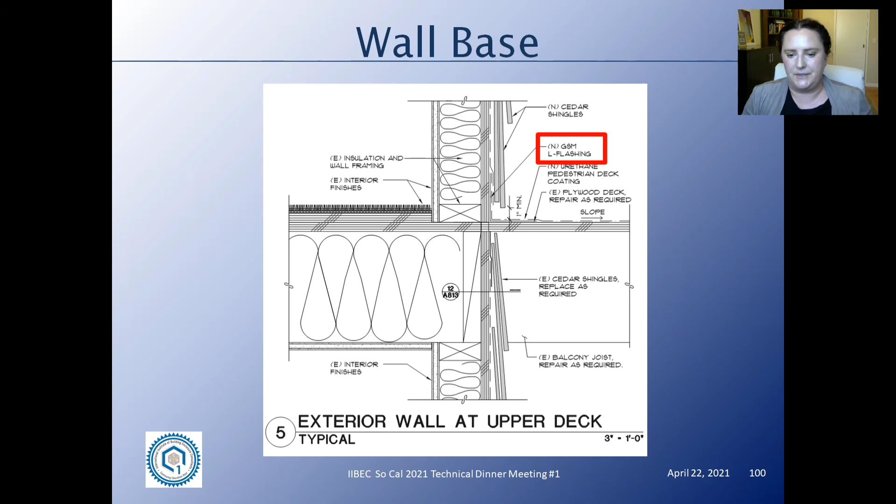Saddle flashing is another one, or lack thereof. Looking at this balcony edge, we have the drip flashing that just finishes right at this edge, so now we have a vulnerable hole there and another one from above. You can actually see in this photo that someone had applied sealant at some point to this edge. Usually when you see sealant globbed on like that, it's an indication that they've had issues there and are trying to deal with it.

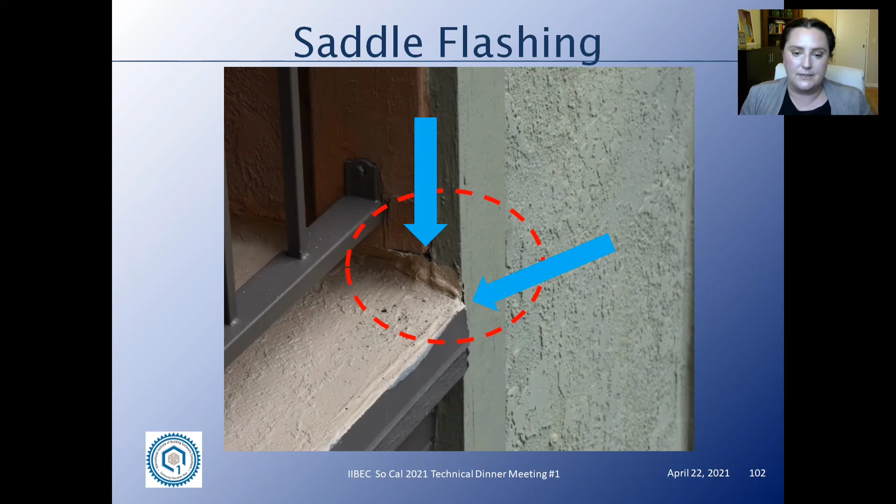Now finally, let's talk a little bit about design recommendations. These design recommendations are not based off of weatherproofing or waterproofing - you do want good weatherproofing and waterproofing to protect your balcony and wood framing. These design recommendations are purely based on the anticipation of having to do these inspections on a regular basis.

Two of the biggest hindrances I see to doing these inspections are enclosed soffits and the type of structural framing used. It makes it sometimes very difficult to either inspect or make repairs. So one design recommendation is to consider not doing an enclosed soffit anymore, and just use open framing. If you do an enclosed soffit, you have to expect that you're going to need to do destructive testing on that enclosed soffit on a regular 6 to 9 year basis to do these inspections.

The issue with open framing is that there are some fireproofing requirements. For exterior walking surfaces, they need to be fire protected. One way to do that is automatic sprinklers, or to limit your building to the type 5B building type.

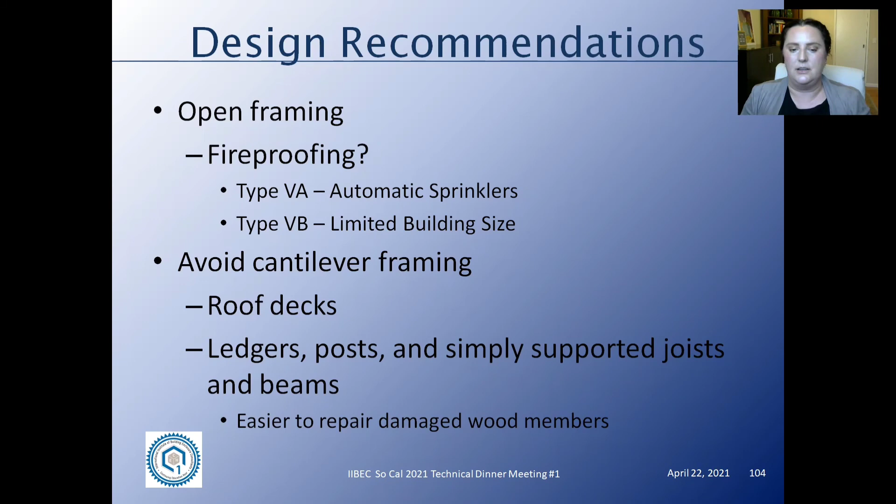If you have to use enclosed soffits, I'd recommend installing access panels, and these access panels need to be large enough to allow probing to happen on your joists.

Another thing you could do is avoid wood or wood-based framing altogether and just use concrete or metal framing. There might also be some fireproofing requirements needed for the metal framing.

And then the last thing is just a good maintenance item for building owners: do regular termite and wood pest inspections. That way you can catch some of these wood pest infestations early, and generally the repairs for that are much faster and easier to do.

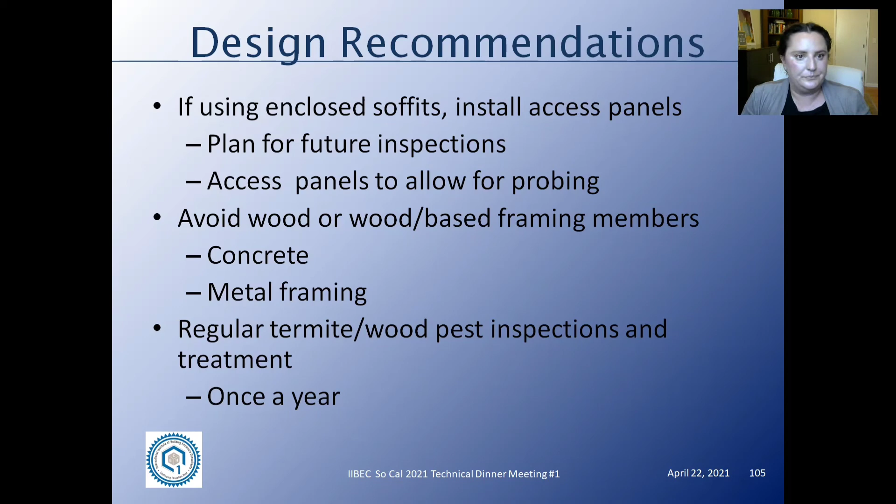So to conclude, E3 inspections are going to become a large part of building enclosure and architecture and engineering work. This may begin to extend into other areas of the construction world. If we have more failures, say, of a roof deck, this might now be part of that—roof decks might become included in this inspection as well. So just consider that this is something that could potentially get bigger and bigger.

It's important to distinguish whether you need to do 721 inspections or 326, as there are some significant differences. And finally, these all rely heavily on your own professional judgment. You as the inspector need to sign and stamp these reports, so you need to use your professional judgment about what you're comfortable with for the owner to understand.

So going back to the question of whether a borescope is adequate or if you need to probe—as a professional, I would require that we probe, because I've seen enough issues where visually something looks fine but could be significantly deteriorated in ways you just can't see, which you can only find through probing. So if I'm going to sign and stamp a report, I'm going to require some type of probing. It relies heavily on that.